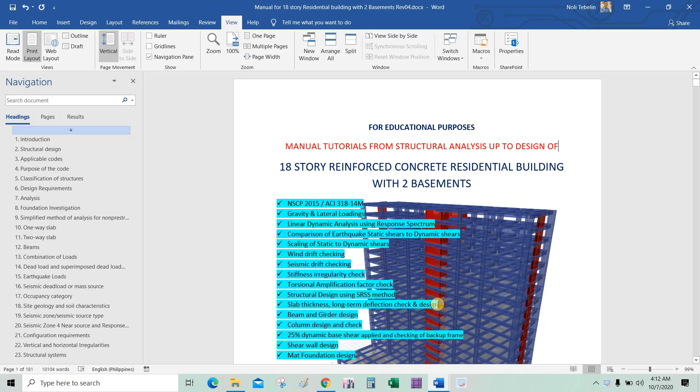So we will be having tutorials for an 18-story reinforced concrete residential building with 2 basements. This is our 3D model.

We will be using NSCP 2015 for the building code analysis and design, also ACI 318-14M.

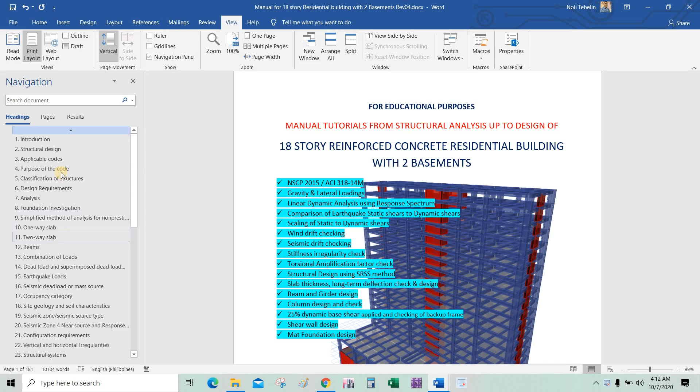Okay, so dito sa manual na to, pakibasa na lang itong mga topics na ito, so hindi natin iisa-isahin to, kasi na-discuss naman ito sa previous tutorials.

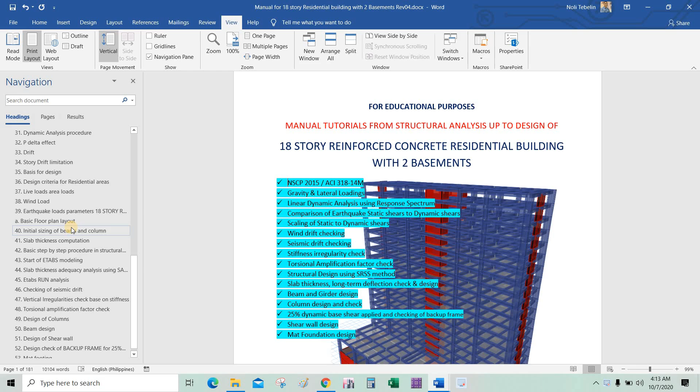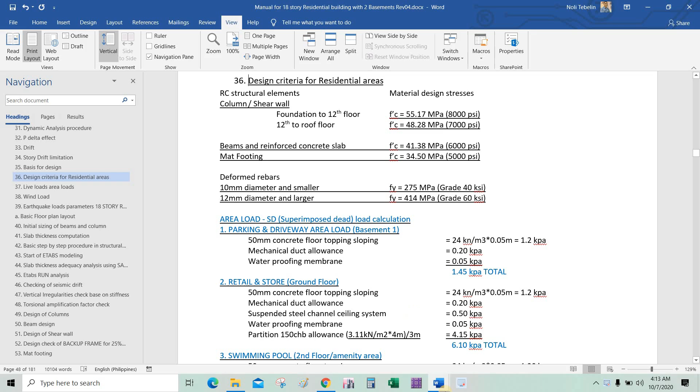So pupunta tayo dito sa design criteria. Okay, bago ma-discuss itong design criteria na to, discuss ko lang muna itong step-by-step procedure using this manual.

So meron tayong design criteria, material properties, dead load and live loadings, wind load parameters, earthquake load parameters.

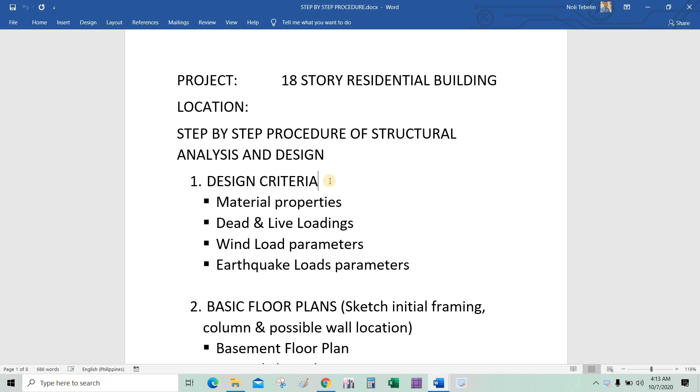Next is basic floor plans, so sketch of initial framings, columns, and possible wall location. So may basement floor plan, ground floor plan, second floor plan, third to roof floor plan.

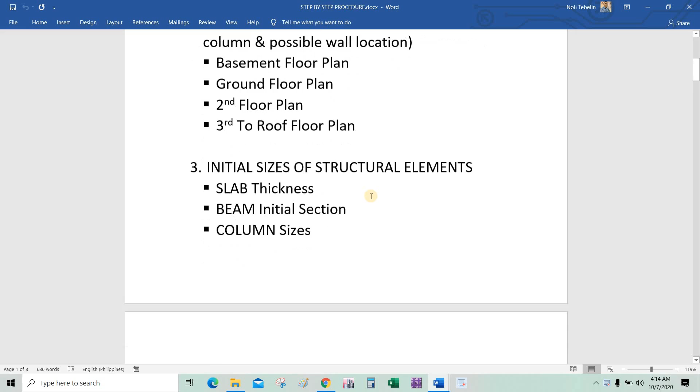Then we will be having initial sizes of structural elements. So napaka-importante, slab thickness. Bago ka magpo-proceed, kailangan mong ma-establish muna yung slab thickness, before you go to design or go to modeling, so you have to establish the correct slab thickness. Kasi yung building loads natin, yung mass of the building or seismic mass ay nakadependent sa slab thickness or sa dead loads.

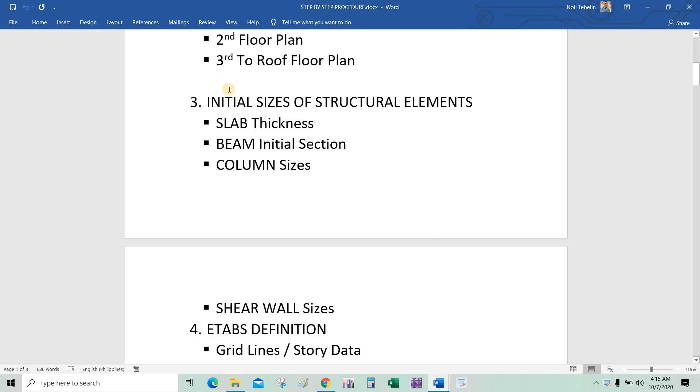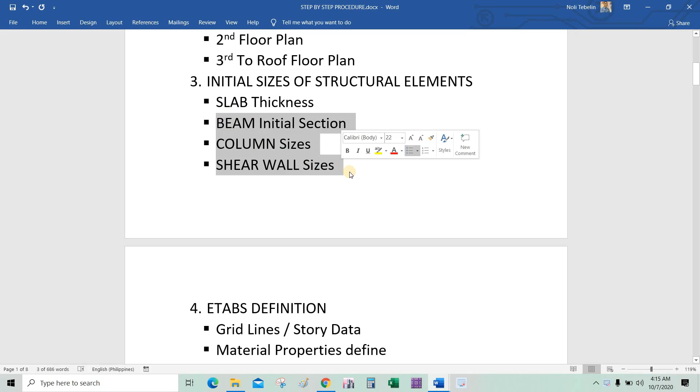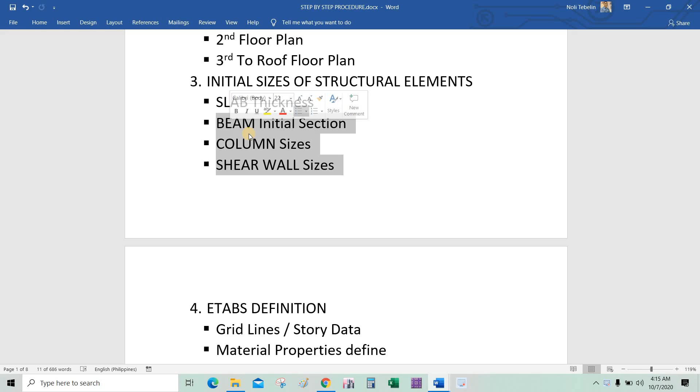Okay, so next is beam initial section. So itong slab thickness, beam initial section, column - initial pa lang 'yan. Pero kailangan itong slab thickness is ma-finalize mo. Itong beam and column and shear wall is you can use as initial, and pwede mo siyang bago-baguhin, depende sa analysis mo, pwede mo siyang i-resize, pwede mong lakihan or liitan. So hanggang dito muna tayo sa initial sizes.

Okay, so dito, discuss yung design criteria na gagamitin natin dito ay RC structural elements, material design stress. So foundation to roof na lang muna to.

Okay, so sa modeling, gawin ko muna siyang for simplicity. Foundation to roof is 8,000. Then beams and reinforced concrete slabs is 6,000, sa whole structure na lang muna to. Mat footing 5,000 PSI or 34.5 megapascal.

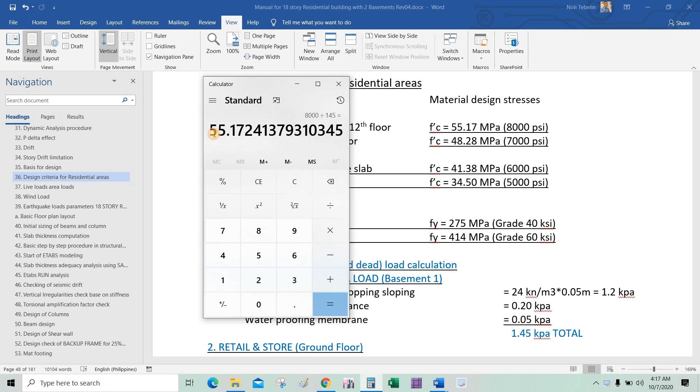So ito is megapascal, 55.17, tapos 48.28, megapascal din, ito naman is PSI. So conversion ko lang yan is simply 8,000 PSI divided by 145 gives you 55.17. Divide 145 lang.

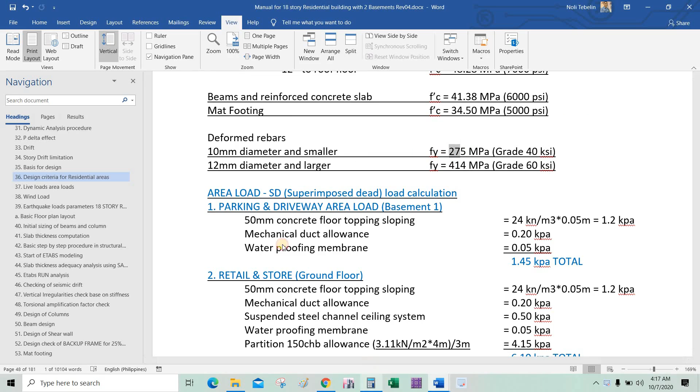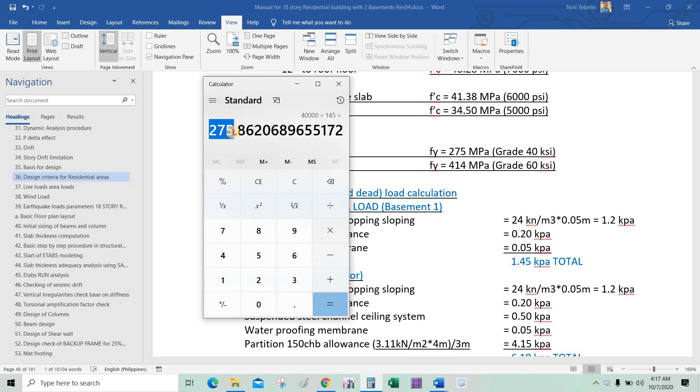Okay, next is for deformed rebars. So 10 mm and smaller is 275 megapascal or grade 40. Grade 40 is 40,000 PSI, that is 275 megapascal. So 40,000 PSI divided by 145 equals 275 megapascal. And ganun din sa grade 60.

Next is loadings natin, area load. So superimposed dead load dito. Yung dead load natin na weight of the structure is concrete, that is 23.54 kilonewton per cubic meter yung concrete.

So let's say 24 na lang, 24 kilonewton per cubic meter. So ito sa 50 mm concrete floor topping, let's say 24 concrete ito times 0.05 meter equals 1.2 kPa. So 1.2 kPa yung 50 mm concrete floor topping, that is conversion mo sa kilogram para mas ma-appreciate mo siya.

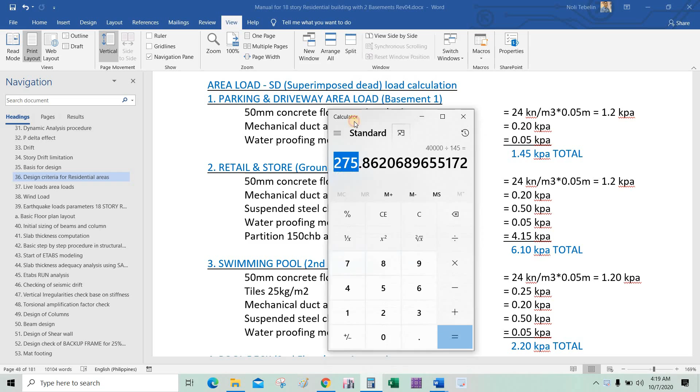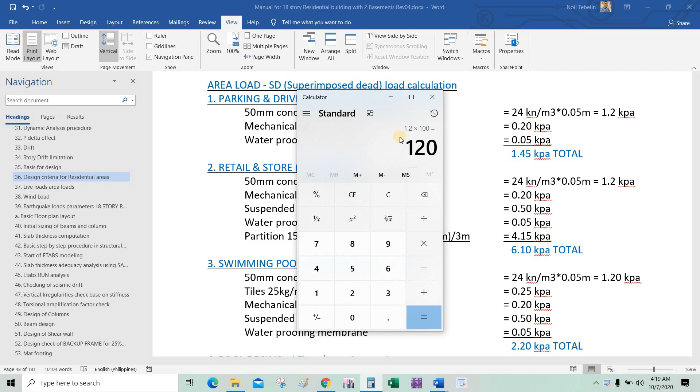So yung 1.2 kPa times 100 will give you 120 kilograms per square meter. So mabigat na itong 50 mm concrete floor topping, 120 kilograms.

Okay, next, mechanical duct allowance 0.2, waterproofing membrane 0.05 kPa, so gives you 1.45 kPa total for the parking and driveway. So sa basement ito, basement 1.

Okay, basement 1. Kasi yung basement 2 natin is, let's say, same pa din dito, pero nasa mat footing - yung isa ay yung basement 2, iloload natin yung sa mat footing. Ito naman sa basement 1 is sa basement 1 suspended slab.

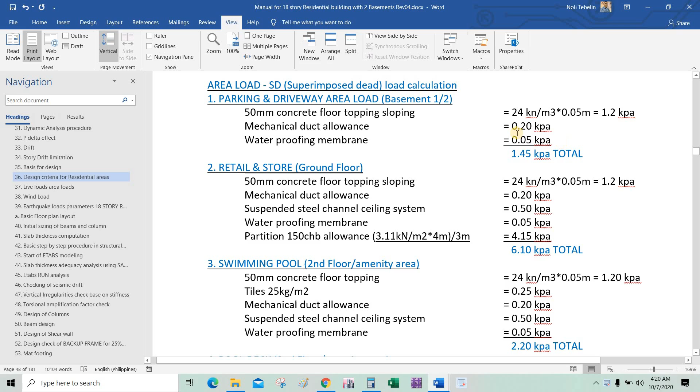Okay, next, sa ground floor, retail and store, meron kang 6.1 kPa total. So 50 mm concrete floor topping, mechanical duct allowance, suspended steel channel ceiling system.

So sa ground floor natin, meron ding waterproofing and meron ng partition na 150 CHB allowance, 3.11 kPa times 4 yung height niya divided by tributary width na 3 meters. In-assume ko lang ito na every 3 meters sa ground floor merong partition na CHB, kasi ano siya, retail and store, so pwedeng mas magaan yung gawing partition. Pwede namang mas mabigat or CHB na lang ang sasabihin o ang i-allow natin.

Kaya ito yung loadings na i-consider natin, so area load ito: 3.11 kPa times 4 meter, ito yung height ng CHB wall, divided by tributary width na 3 meters. So let's say i-spread natin ito sa buong ground floor, so we will have 6.1 kPa total.

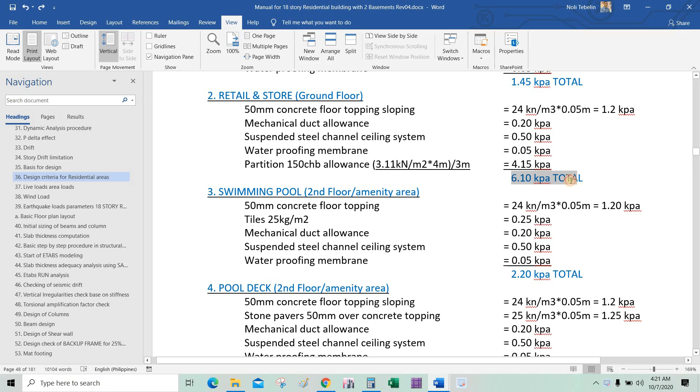Next is sa second floor, meron tayong amenity area. So ganun pa rin, ang madadagdag lang ay tiles na 25 kilograms per square meter, that is 0.25 kPa. So 2.2 ang value natin sa superimposed dead load ng swimming pool.

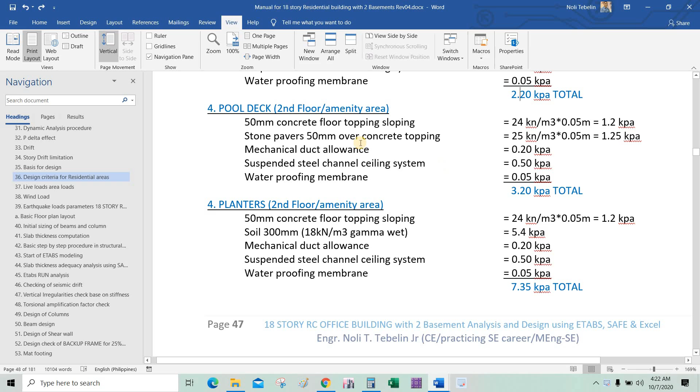Next sa pool deck, ito yung sa tabi ng swimming pool, doon pa rin sa second floor amenity area. So meron tayong stone pavers na 50 mm over concrete topping.

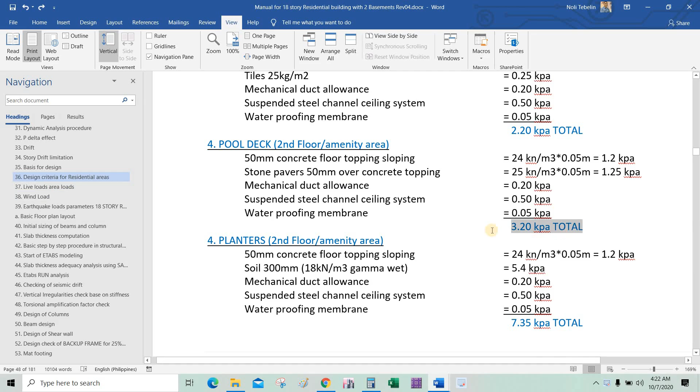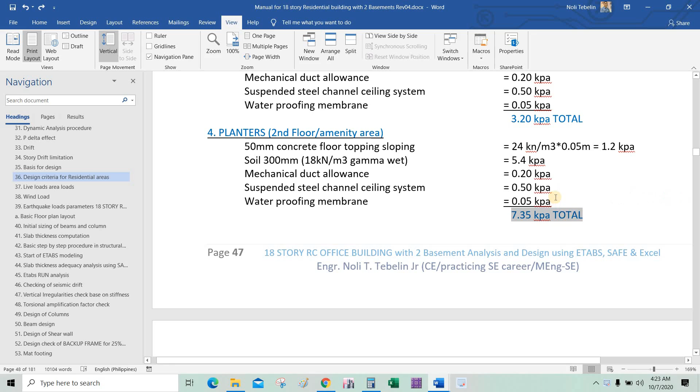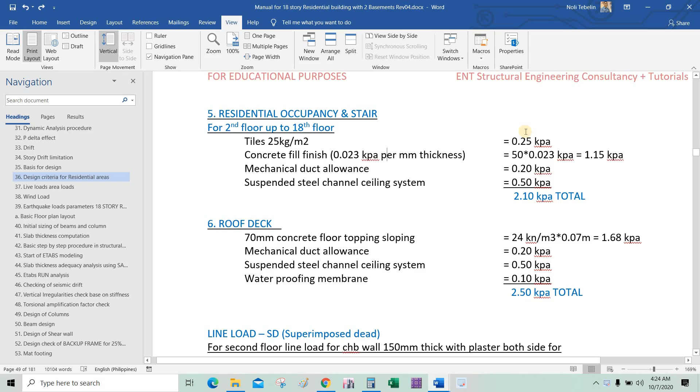Okay, next is residential for second floor up to 18th floor. So ito yung breakdown. Tiles, concrete fill finish, 0.023 kPa per mm thickness. So 50 mm times 0.023 kPa gives you 1.15 kPa. Ito naman is concrete fill finish, mas magaan ito sa concrete. Yung concrete natin is 24 or 23.54 times 0.05, so 1.2 kPa siya. So mas magaan ito, concrete fill finish ito, hindi nabuhos yan. Okay, so 2.1 tayo sa residential occupancy.

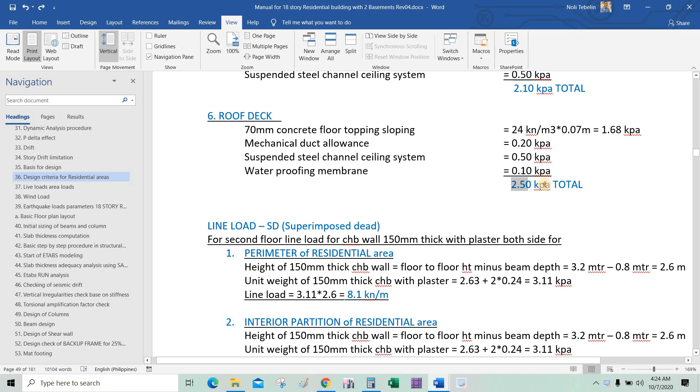Next, sa roof deck naman, ito yung buhos na naman, 70 mm concrete floor topping sloping. So 24 times 0.07 gives you 1.68. Then will give you 2.5 kPa total roof deck superimposed dead load.

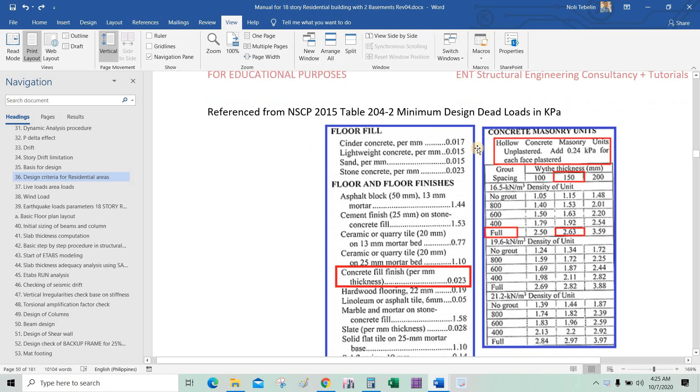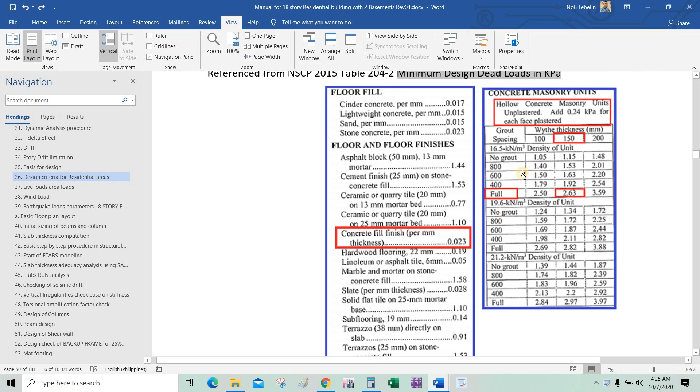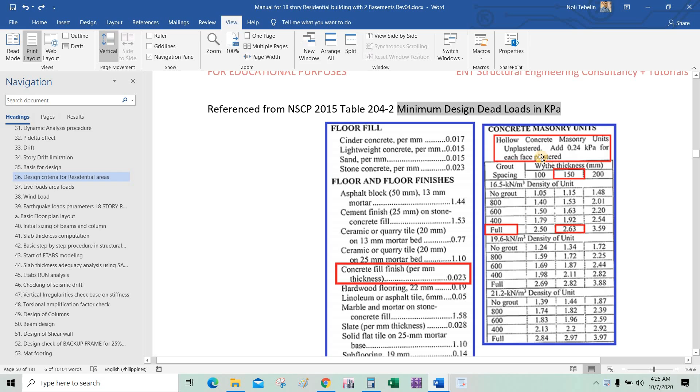So dito tayo sa line load. Before we go to the line load, meron tayong reference from NSCP 2015 table 204-2, minimum design dead loads in kPa. So ito yung concrete fill finish per mm, then ito naman yung concrete masonry units. Let's say 150 mm thickness, then 2.63 kPa siya, unplastered. Then add 0.24 kPa for each face for the plastered.

Okay, dito na tayo sa line load. For second floor, line load for CHB wall 150 mm thick with plaster both side for perimeter of the residential area. Height of 150 mm thick CHB wall: let us have 3.2 floor to floor height minus 0.8 meter, ito yung beam depth. Then ito yung 2.6, yung height of CHB wall. Then unit weight niya is 2.63 plus plaster 0.24 each face, so gives you 3.11 kPa. Then we will be having line load, 3.11 kPa times 2.6 meter. This is in kPa. Times mo ng meter, 2.6, so gives you 8.1 kilonewton per meter. So 8.1 times 100 will gives you 810 kilogram per meter. So malaki yung loadings na ito, mabigat itong CHB na to.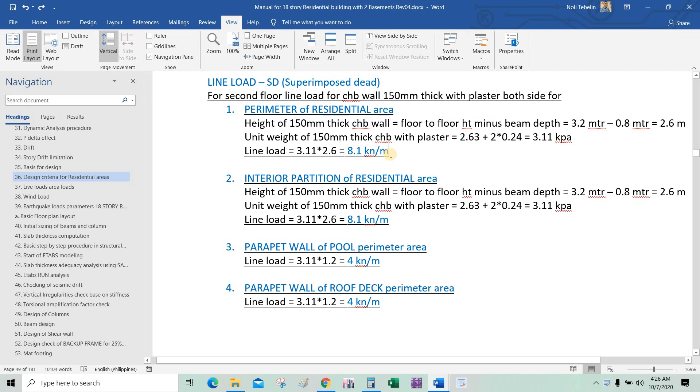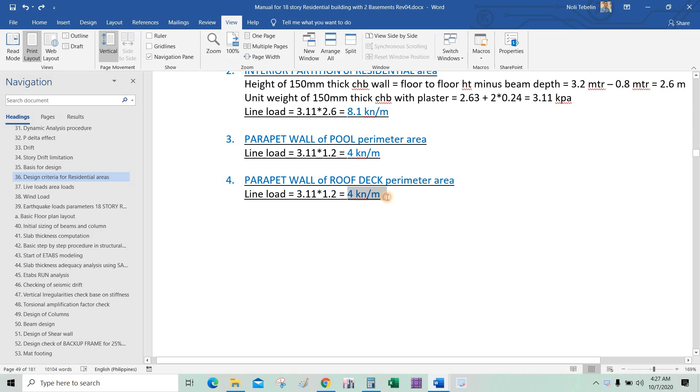8.1 kilonewton per meter. Then interior partition of residential, the same 150 thickness, then the same yung height. Parapet wall of pool perimeter area at second floor, so 1.2 height will give you 4, and parapet wall of roof deck perimeter area is 4 kilonewton per meter. So okay na tayo dito sa dalawa.

Next is wind load parameters and earthquake load parameters.

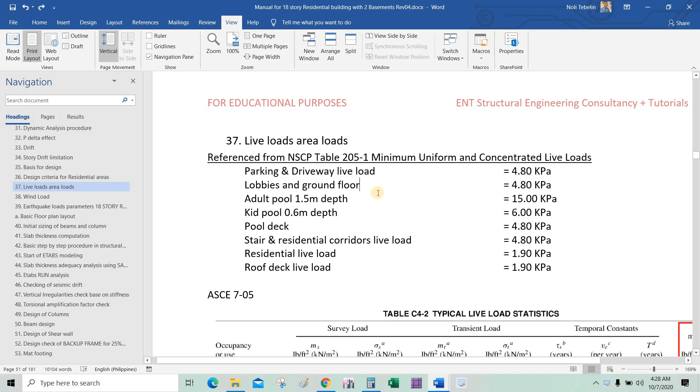Okay, so ito yung live load. Live load natin is minimum, reference natin sa NSCP. Parking and driveway, we will have 4.8. Then lobbies and ground floor, 4.8, or ground floor ko ay retail and store. 4.8.

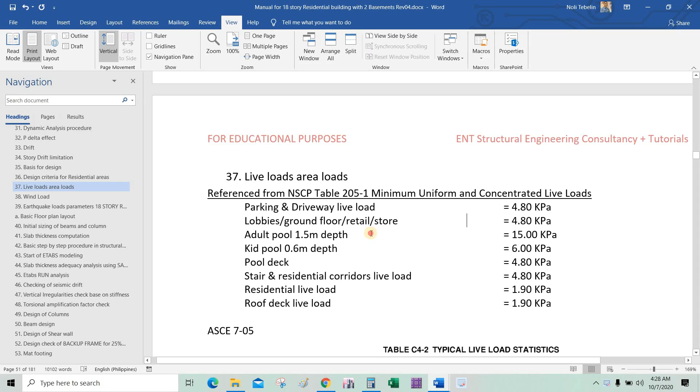Adult pool, so 1.5 meter depth, so 15. Let's say yung water is 9.81, gawin na natin 10. Kaya 1.5 times 10. And kid pool is 0.6 times 10. Then pool deck is 4.8. Stair and residential corridors, live load 4.8. Residential live load 1.9, roof deck live load 1.9.

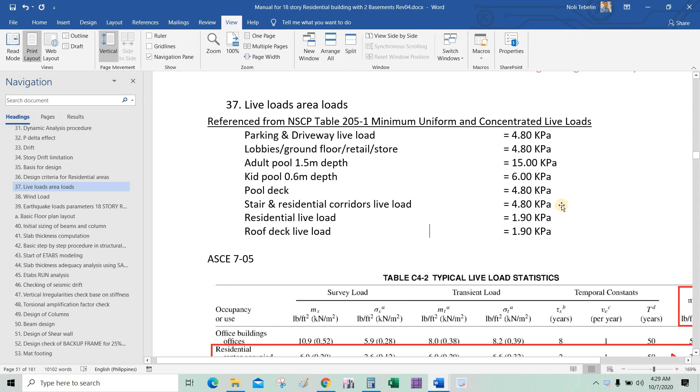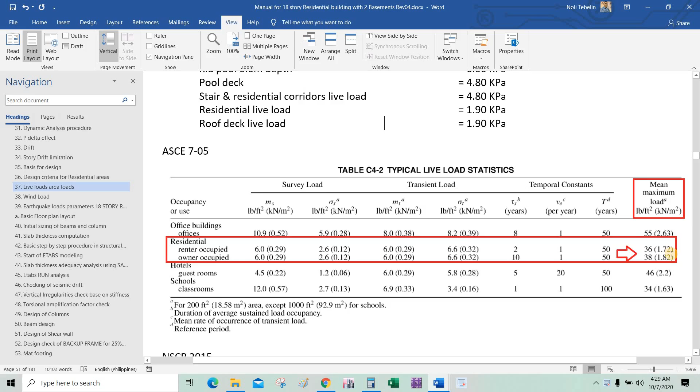Then sa ASCE naman ito, typical live load statistics. So residential, ito halos nasa 1.9 din ito. Then sa NSCP, residential basic floor area is 1.9.

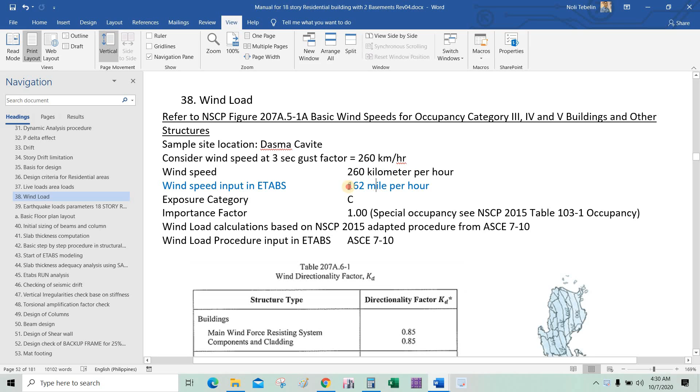Okay, next is wind load. So meron tayong sample site location, Dasma Cavite. Consider wind speed at 3 second gust factor is 260 kilometer per hour. Then wind speed is 162 mile per hour, ito yung input sa ETABS. Exposure category C, importance factor 1. Wind load calculation based on NSCP 2015, adapted procedure from ASCE 7-10.

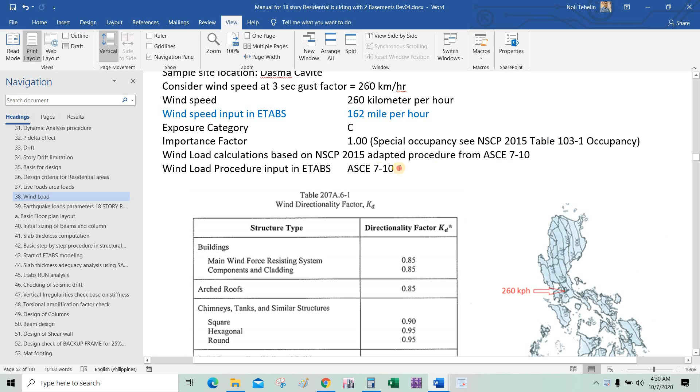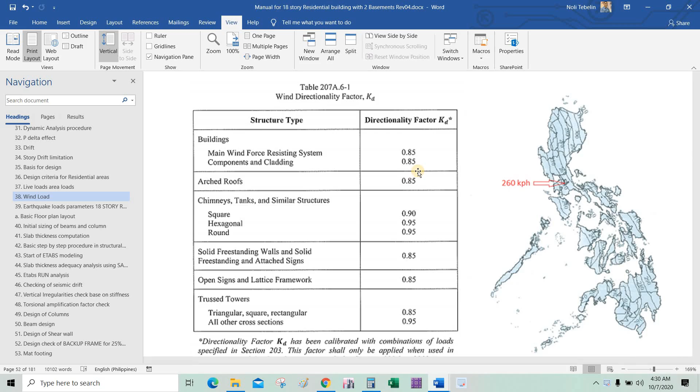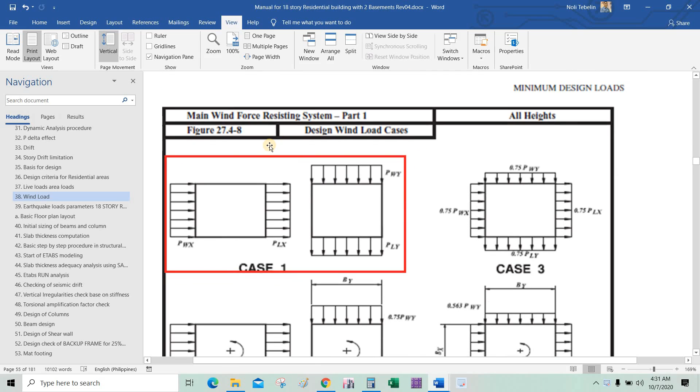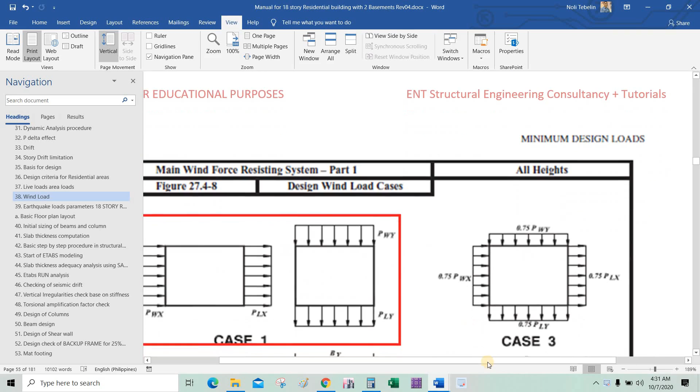Ito naman yung mga inputs or ito yung mga snip excerpt from the code. So ito lang yung gagamitin natin, ito lang i-apply natin sa ETABS. Case 1 lang, so 100% yung wind pressure sa X and Y direction. So ito lang na case 1.

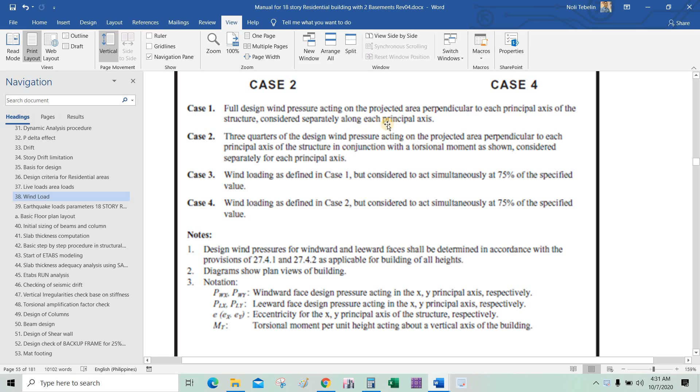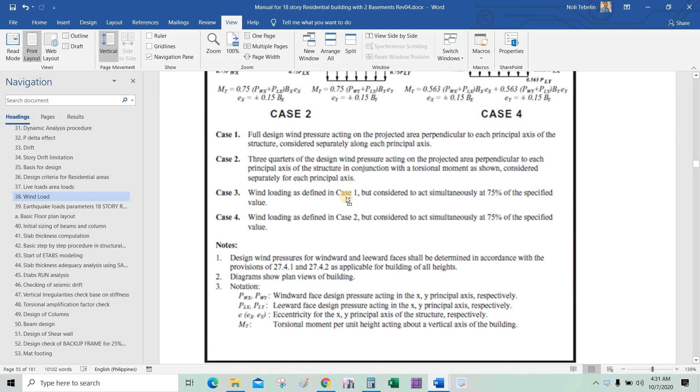Full design wind pressure acting on projected area perpendicular to each principal axis of the structure, considered separately along each principal axis. This calculation is automatic in ASCE 7-10 or NSCP, but for our exercise, we'll only use case 1, along X and along Y.

Next, for earthquake parameters: sample site location is Dasmariñas, Cavite, importance factor is 1 for special occupancy, per NSCP occupancy categories. Structural system is dual system with shear wall and moment resisting frame. Refer to NSCP 2015, section 208.4.6, for reduction of base shear factor and ductility factor.

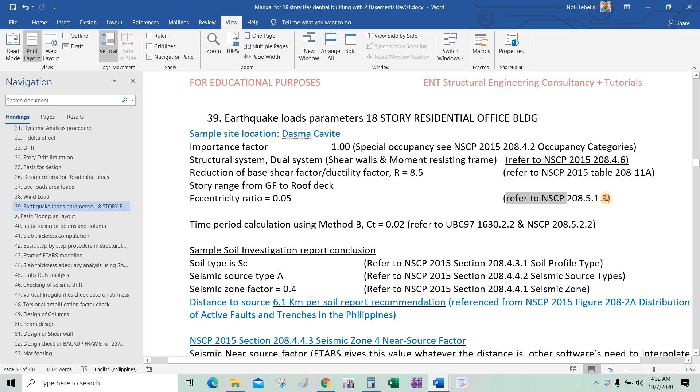Time period calculation for design uses method B. Method A and method B are for design purposes, while the time period in drift checking is for the actual behavior of the structure, so we go to the fundamental period from the modal analysis, which we use for seismic drift checking.

Sample soil investigation: since we're using mat foundation, it means the site location has good soil, so soil type C. Refer to this, or refer to the soil investigation report.

Conclusion: seismic source type A, refer to section 208.4.4.2. Then seismic zone factor is zone 4, a high seismic zone, refer to this one.

Distance to source is 6.1 kilometers, per soil report recommendation.

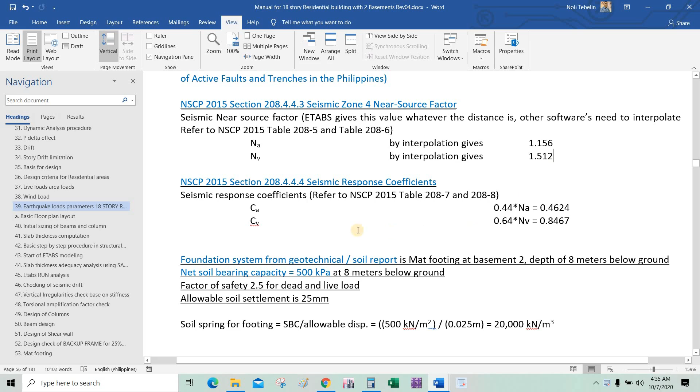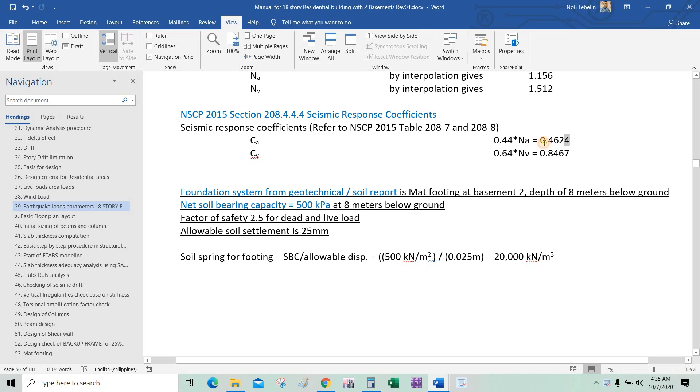The values are NA equals 1.156 and NV equals 1.512. Then CA and CV are 0.44 times NA and 0.64 times NV, giving 0.4624 and 0.8467. This acceleration value is quite high, around 0.46G.

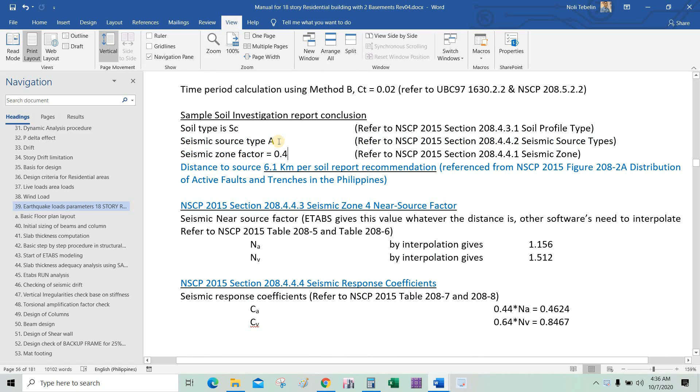Next is the foundation system. From the geotechnical soil report, the recommendation is to use mat footing, at basement 2, depth of 8 meters below ground. Net soil bearing capacity is 500 kPa, factor of safety for dead load and live load is 2.5, and allowable settlement is 25 mm.

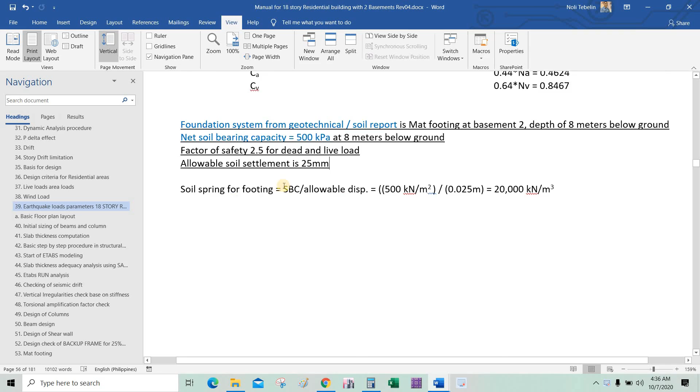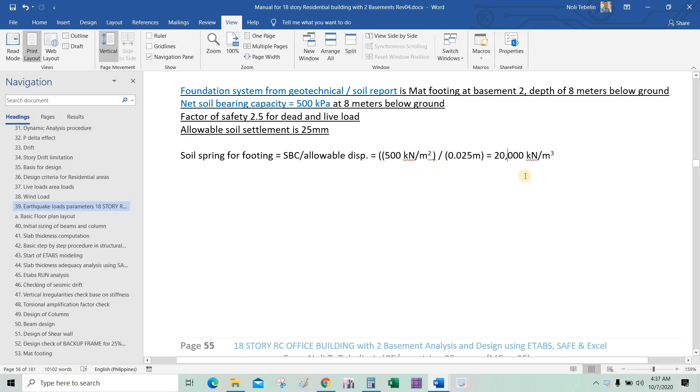For the soil spring, it's SBC, soil bearing capacity, divided by allowable soil settlement: 500 kPa divided by 0.025 meter gives you 20,000 kilonewton per cubic meter spring, used as area spring.

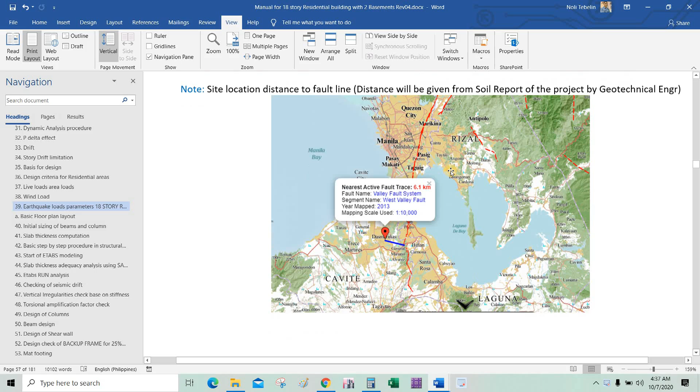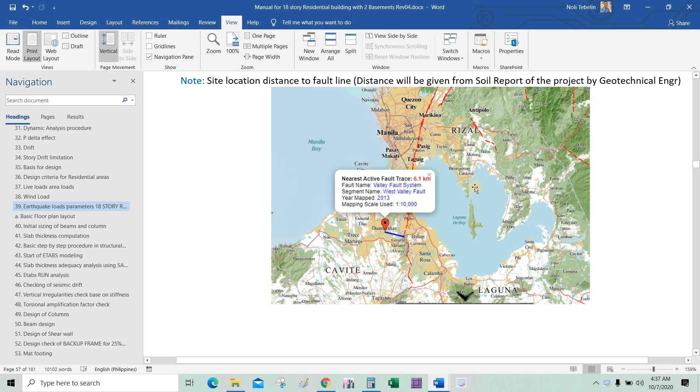For example, here's the site location and distance to the fault line. So that finishes the design criteria.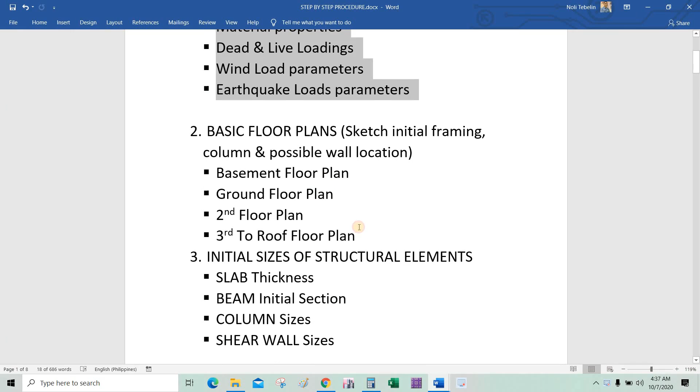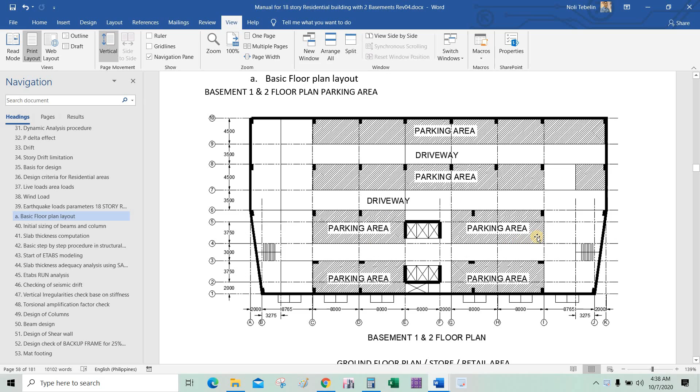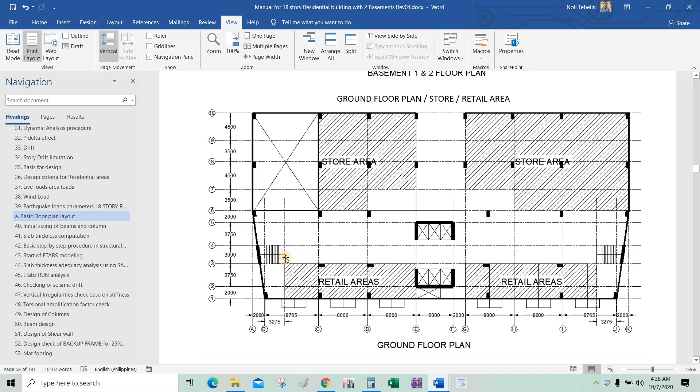Now for the basic floor plans. This is the basement with parking, driveway, basement 1 and 2. Next is the ground floor: this part goes down to the basement from the road, and this is the entrance into the building, with stores, retail area, elevator, and stairs on the left and right. That's the ground floor plan.

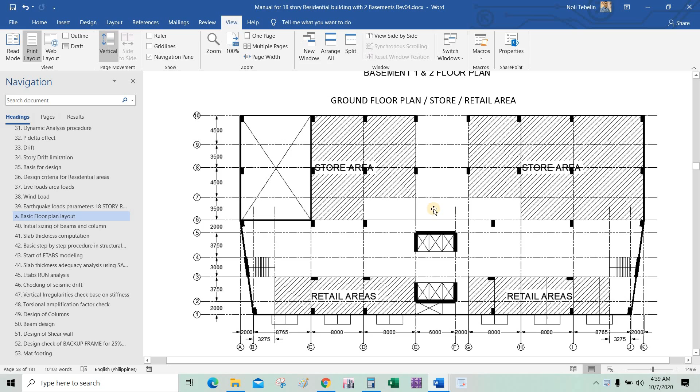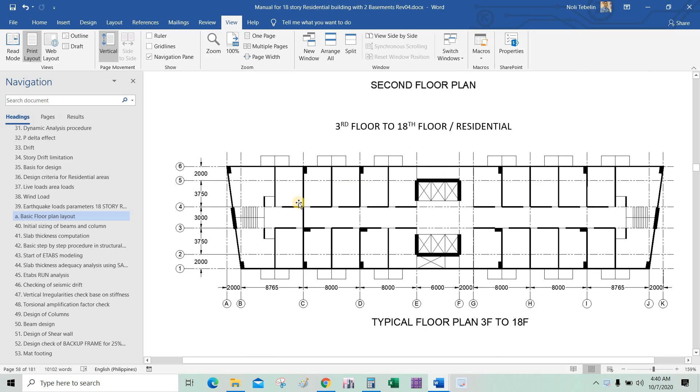Next, on the second floor there's still a residential area. Then from the third floor to the 18th floor is a typical residential hallway layout, and the roof follows a similar arrangement.